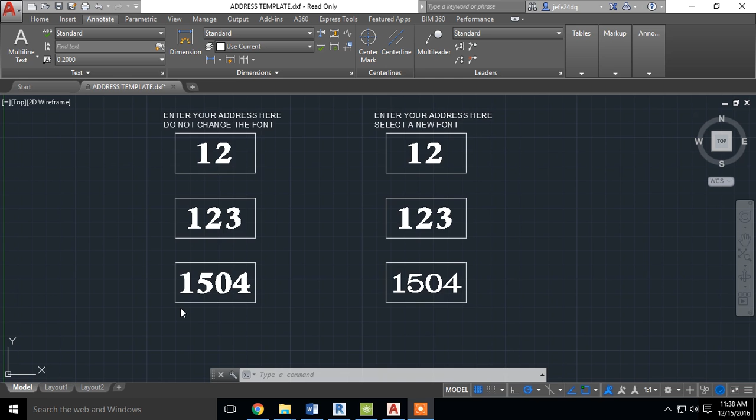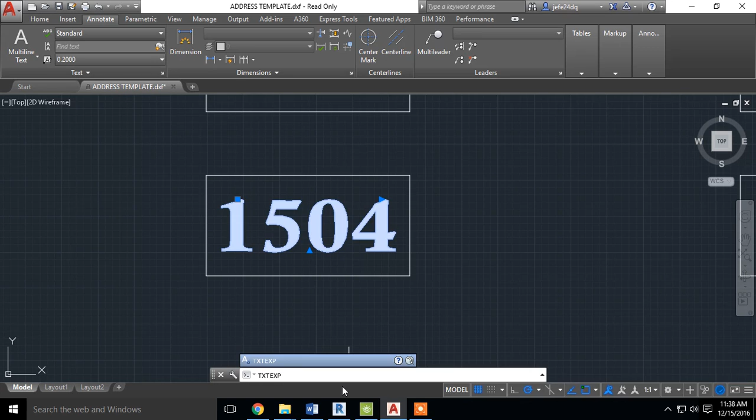Okay, so after you've come up with your different fonts that you want to do, what we're going to do now is change the layout of this font so that it can communicate with the plasma cutter. The first thing we're going to do is select our font, and we're going to type in TXTEXP, enter. What that does is it explodes our font into a series of line work.

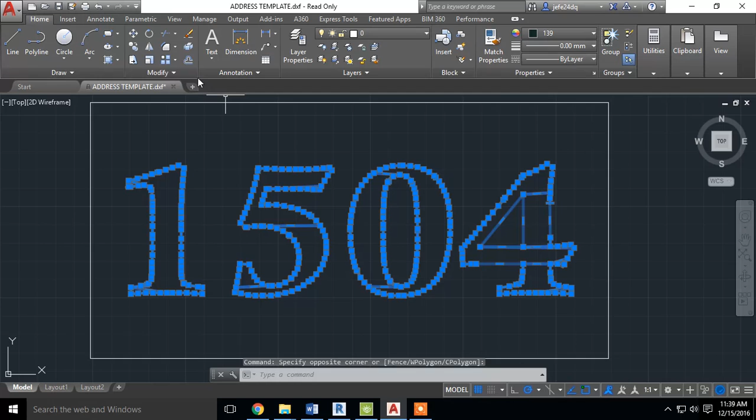But what you can see is it's still grouped together relatively. So what we're going to do is left click and make a blue box around it, select all your numbers, and then hit the button in the Modify tool on the Home tab that says Explode.

Let's do that one more time. We're going to do it twice. Click, highlight, explode.

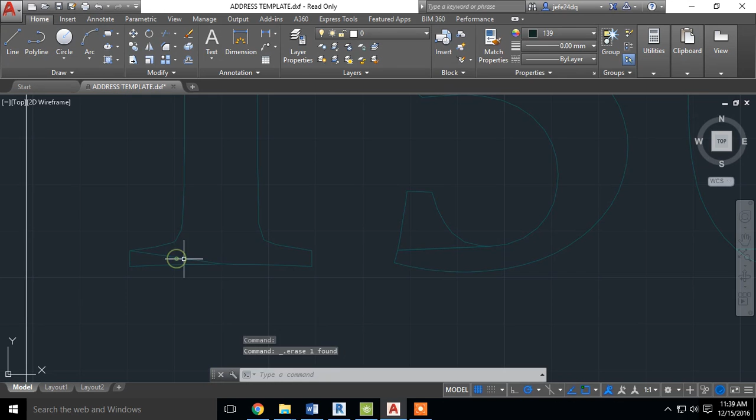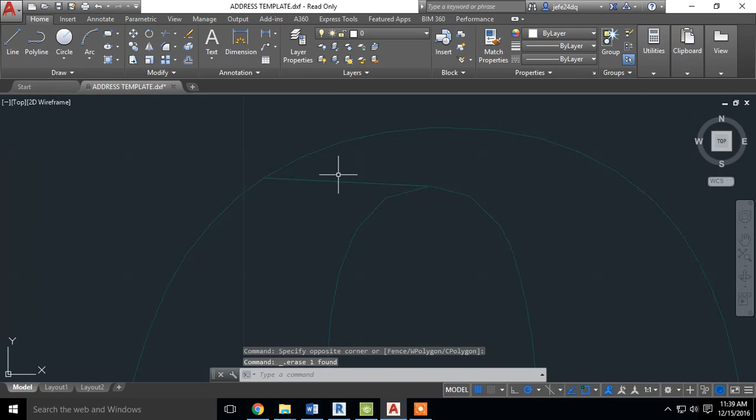Now I could go in and delete all these lines that are in the middle. We need to get rid of all these, so I'm going to click on all of them. Sometimes there's two, so I click once, hit delete, click twice, hit delete. I could also click and make a little green box. I'm going to delete all of my double line instances that are in here. We just want the outline of the numbers, we don't want these lines in the middle. So I go through and I'm deleting all of these.

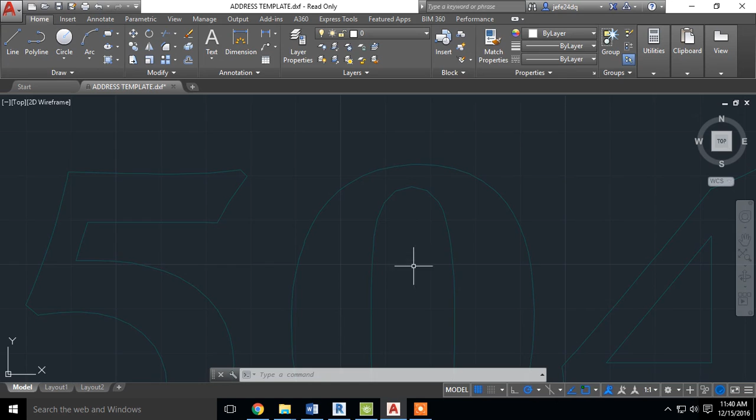Alright, so I should have just some standard block numbers. The next thing I need to do is make some bridging to hold on to this little piece. If you don't know what I'm talking about, you could look at the example I have, but we need a little strip of metal right here to connect this part in the middle, or else it's going to fall apart from our cutout.

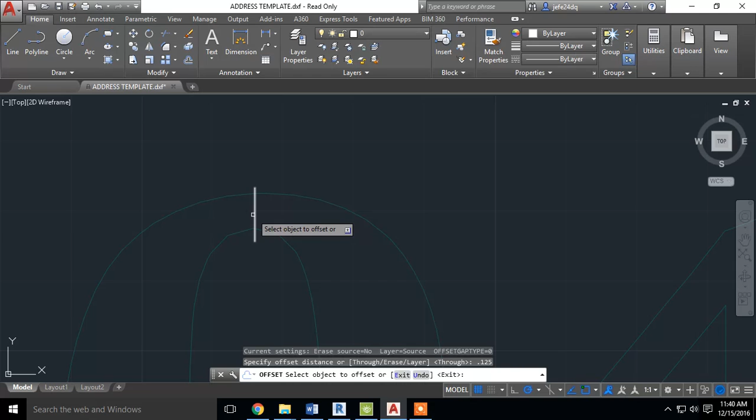So what I do is I make one line like that in the middle, and we're going to use the offset command. We click offset, 0.125, enter, and we click to the left and click one to the right.

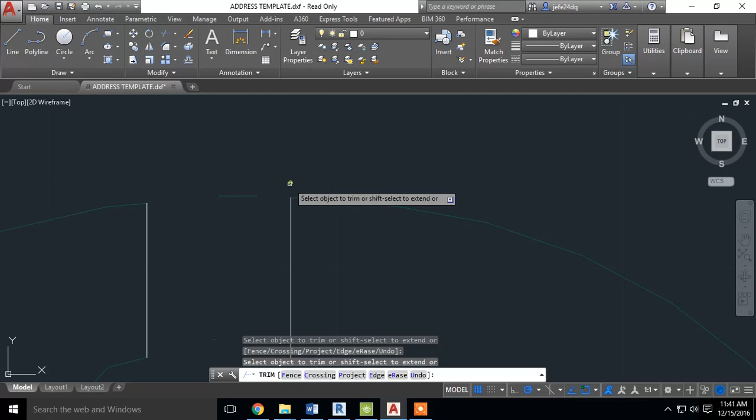Now what we do is we're just going to delete that middle line. We're going to hit the trim button right here, hit trim, enter, and we're going to cut these pieces away just like so. I'm trimming all of these pieces right here, and now I could delete this line, and you see the little tiny piece hanging in there. So now I made a little bridge to connect the middle part.

Let's do the bottom again. Once again, I just make a line about in the middle. I hit the offset command, type in 0.125, enter. I click line 1, click to the left. I click the middle line, click to the right.

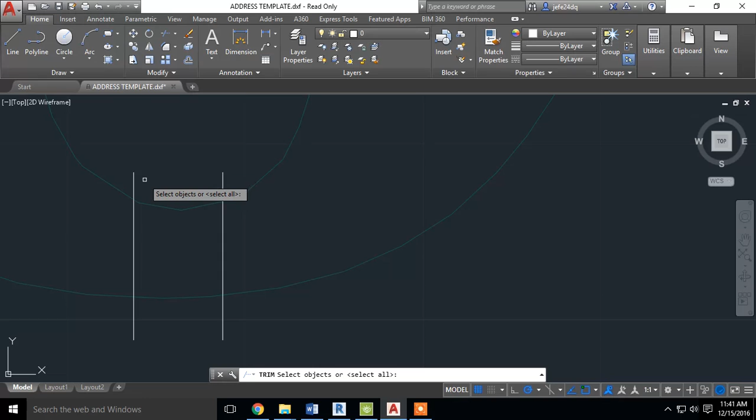Now I delete that middle line. I hit trim, enter. I come right here and I'm trimming away those pieces that connect it. I trim those pieces, and after I'm done trimming my extra pieces, I would delete those pieces. Now I have a bridge.

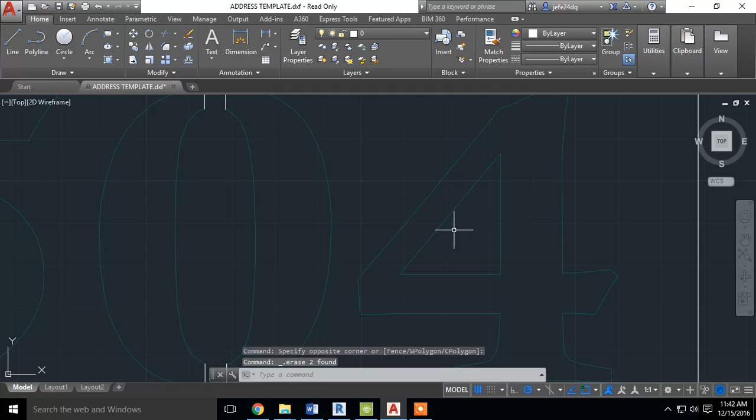Let's do it one last time. I make a line in the middle, perpendicular to this line. I hit offset, and we're doing 0.125 distance because we want the whole thing to be a quarter inch. That's about the minimum the plasma cutter can handle. I click to the left and the right of the line.

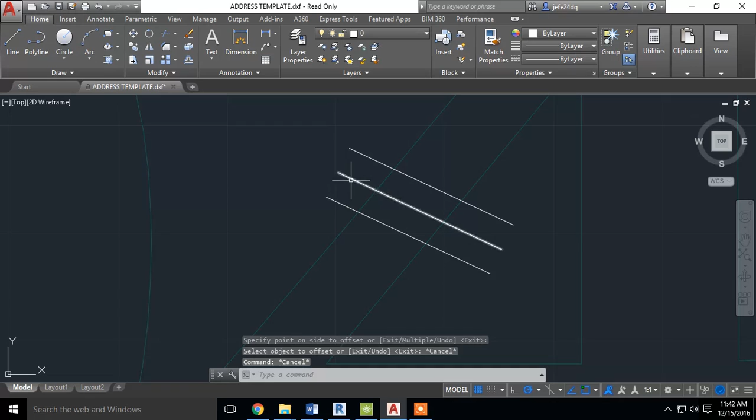We delete this middle line. I hit trim, enter, and then I trim away these pieces that are bordering it. Trim, trim, trim, trim. And there it is, that is my address label all ready to be lasered out.

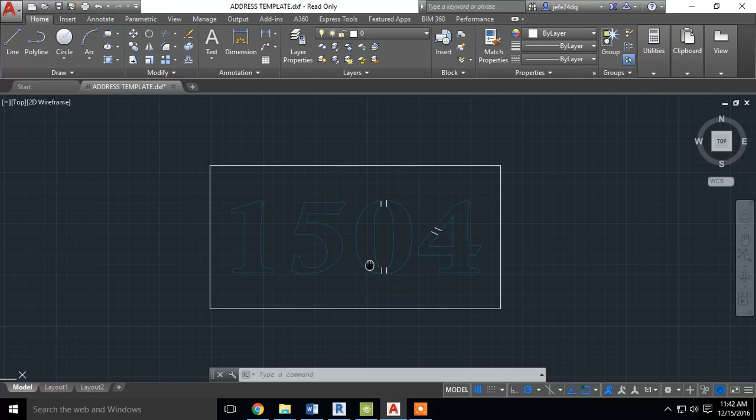You could do the same thing to this one. You only need to do it to one. Once you have it done, you're going to delete all these extra ones. We're only doing one, so if you do both of them, pick the one you like most. So I like that one most, and then you would save it and upload it into the Google Classroom.